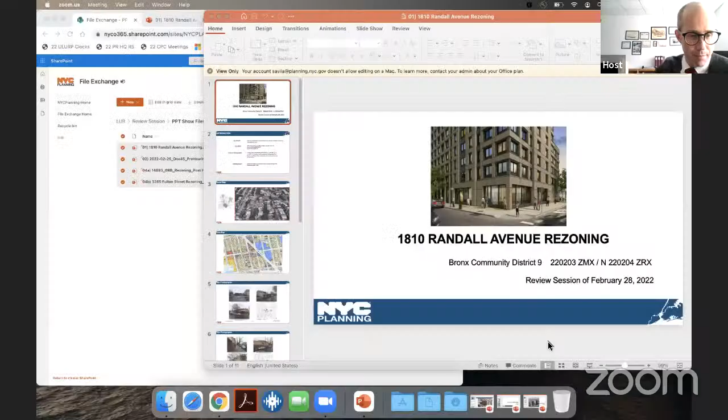Good afternoon, commissioners. This is the 1810 Randall Avenue rezoning here before you for certification. Next slide, please.

The project site is located in the Soundview section of Bronx Community District number 9. The applicant is the Second Pentecostal Church of God La Hermosa and Vertical Community Development, LLC. They are seeking a zoning map amendment from R4A C1-2 and R5 C1-2 to R6 C1-2. In addition, there's a zoning text amendment to Appendix F of the zoning resolution designating the rezoning area as an MIH area. Next slide, please.

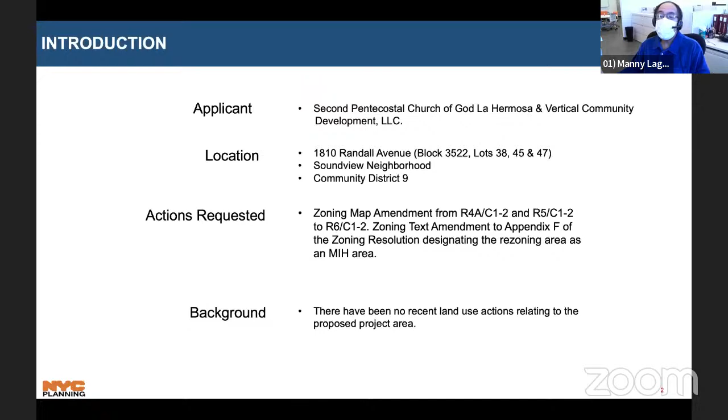The project area development site is outlined in red. It's bounded on the north by Randall Avenue, on the east by Taylor Avenue, on the south by Lacombe Avenue, and Beach Avenue forms the western boundary. The development site is approximately 20,000 square feet of lot area, and it currently contains 3 lots.

2 of those lots contain 2 buildings. One is for an existing house of worship, and the other building contains 4 commercial uses, one of which is vacant. Now, to the right, looking at the east portion of the development site, there's a parking area, accessory parking to the house of worship, and it has a capacity of 20 cars.

The remainder of the block is 2- and 3-story, 1- and 2-family residences. And the same is true for the surrounding areas, basically 2, 3 stories, attached, semi-detached homes in the area. Now, the transportation is good. You have the Bronx 27 bus, which travels east-west along Randall Avenue, and you also have the Bronx 39, which travels north-south at Soundview Avenue. Next slide, please.

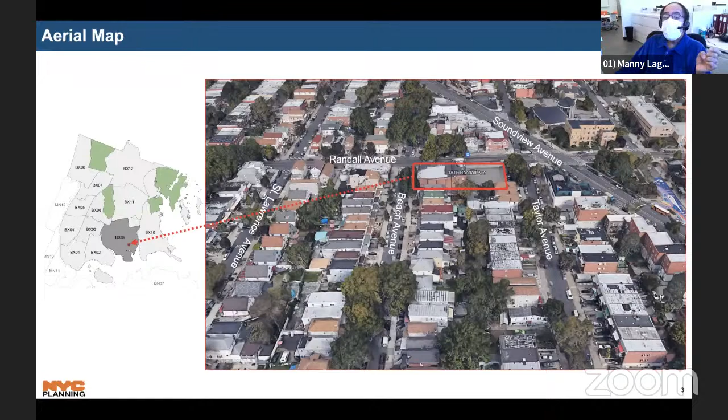In the center, you have the block frontage on Randall Avenue, which is the development site in red. Just moving across Taylor Avenue, you have the Seabury Daycare Center, and 2 blocks away from there, you have PS 69. Above that, you have the Holy Cross Church and School. Again, this land use map indicates the predominance of low-density residential. However, when you go to the west, 2 or 3 blocks away, you can see that there are, in yellow, 6-story developments nearby. Next slide, please.

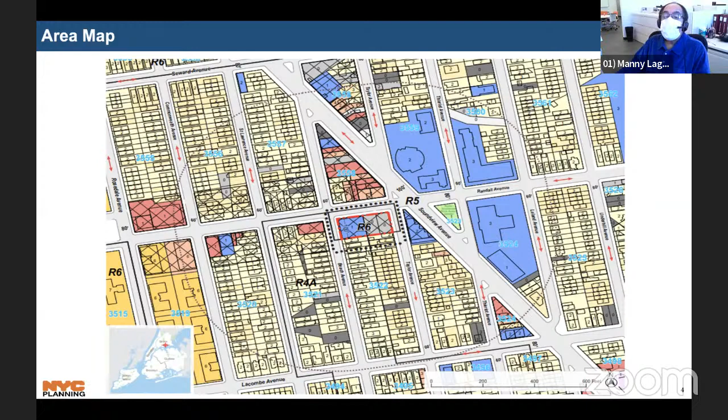These are photographs of the site. We're looking from Randall Avenue south at the parking area that I mentioned, which is accessory to the house of worship. Immediately to the right is the house of worship itself. On the second slide to the right, you see that adjacent to the house of worship you have the 4 commercial uses. And the bottom left slide is at the intersection of Randall Avenue and Beach Avenue. It shows you the other side of the building. Next slide, please.

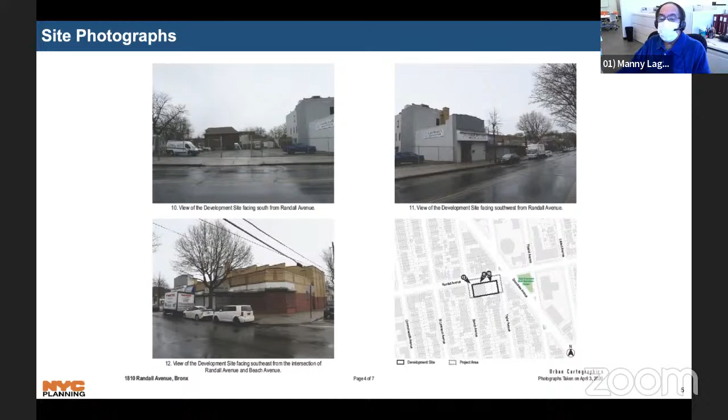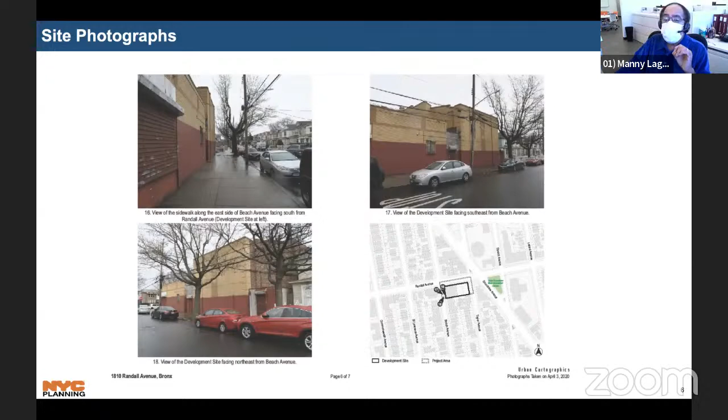Here we're looking at Beach Avenue. We're looking south again. We're at Randall Avenue, and you can see in the background the character. It's again basically low density housing. The same is true on the right. It shows the building almost abutting on the residences themselves. Next slide, please.

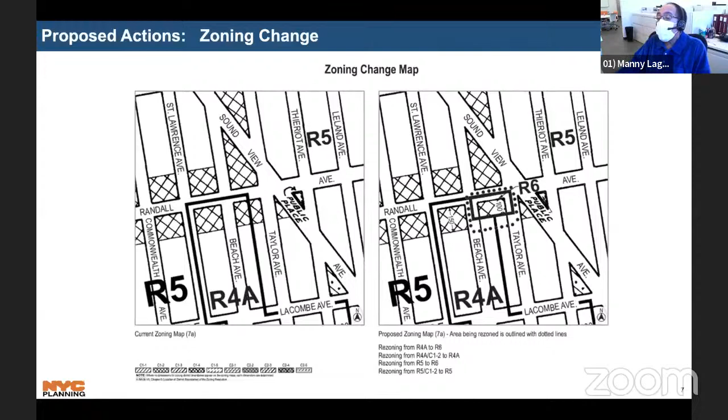This is your existing and zoning maps. Again, in the center, you see that the site is split. It's on the western portion of that block is R4A, and on the eastern portion is R5. The drawing on the right indicates what the zoning proposal will do at this location, the establishment of an R6 zoning district, which will allow the applicant to build an 8-story mixed-use building. Next slide, please.

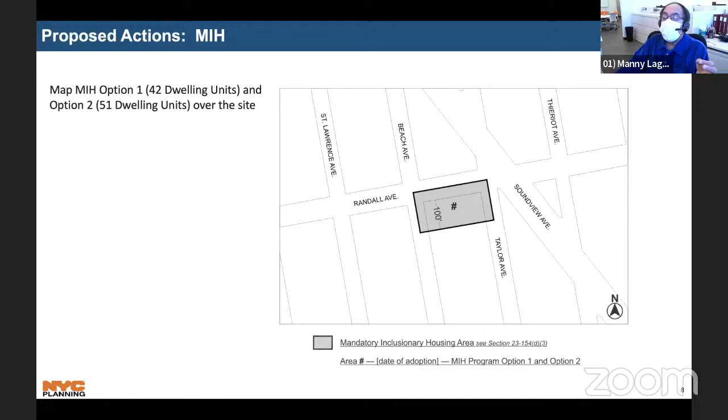And the other action is the text amendment to Appendix F of the zoning resolution, as you can see here, it is mapped. The applicant has selected option 1 and option 2. Option 1 affords 42 dwelling units, and option 2, 51 dwelling units over the site. I just want to mention that the overall development is 100% affordable. Next slide, please.

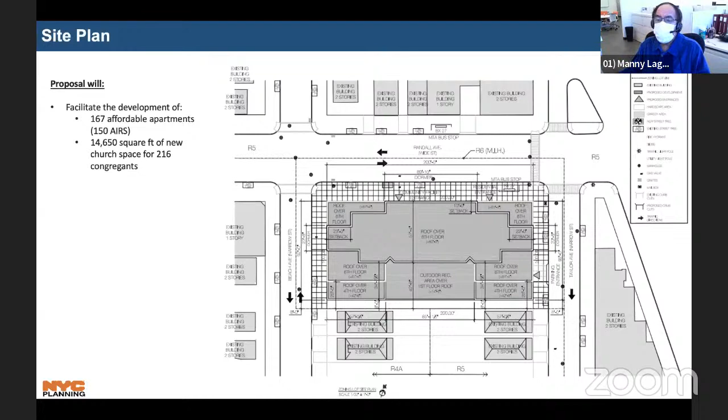The site plan indicates that your 8-story building is stepping down. It steps down towards the frontage of Randall Avenue, as well as it gets closer to the residential homes on the south, stepping down from 8 to 6 stories to 4 stories. In addition to that, the applicant has provided an 8-foot side yard for further separation of these uses, allowing for light and air to these adjacent abutting uses. Next slide, please.

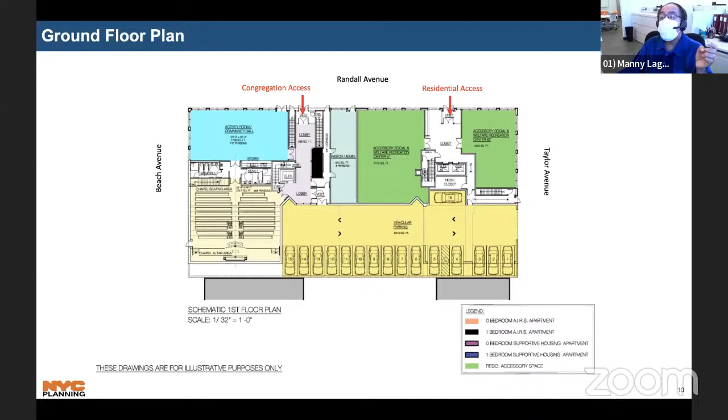Okay, the floor plan in blue shows the activity room and community hall for the house of worship, which will stay at this location. Just below that is the chapel, with a seating capacity of 216 seats. The access to the congregation, as shown in red, is off Randall Avenue, along with the residential access. In green, you see there are 2 recreation centers. In the back, there will be accessory parking for 16 cars, accessed through Taylor Avenue, which is a 2-way street.

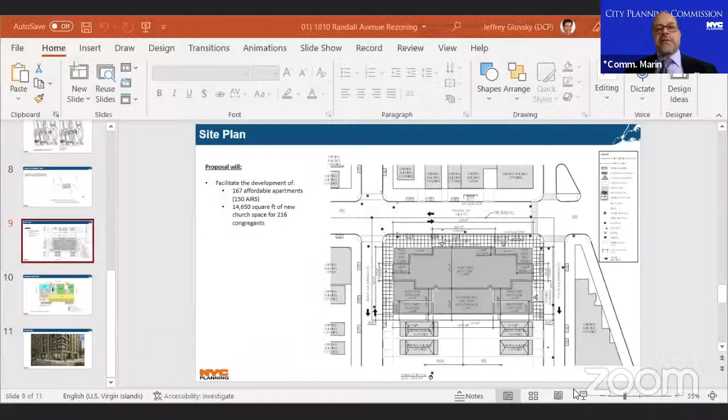Yes, I will convey this information to the applicant.

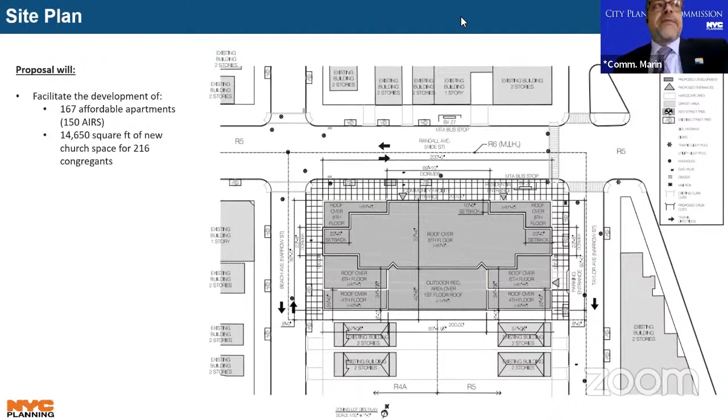I think what's more important for us is the marketability and lease-up of those studios and one-bedrooms. I think that would be very helpful. Thank you, Commissioner.

Looking to see if anybody else has questions or comments. Seeing none, this matter is certified. We thank you very much for the presentation, Manny. We'll see you soon, and we're moving on to our next item of the day, the Manhattan pre-hearing item.

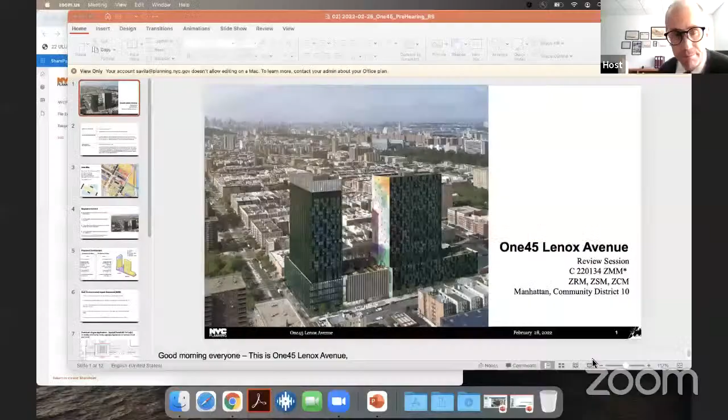So Ryan, would you like to introduce that? Sure - it's the second item on the agenda, pre-hearing review of a zoning map and zoning text amendments and special permits in Manhattan Community District 10. Our presenter is Jose Trucios. Hi everyone. Good afternoon, everyone. This is One45 Lenox Avenue.

A private application on behalf of One45 Lenox LLC for a zoning map amendment, two zoning text amendments, 3 special permits, and 3 City Planning Commission certifications to facilitate development of a mixed-use building in Community District 10, Manhattan. The application was certified on November 15, 2021, and was duly referred to Manhattan Community Board 10 and the Borough President for 60 and 30 days, respectively. The proposal will yield a new mixed-use building with up to 939 new apartments in Central Harlem, as many as 292 of them reserved for low and middle-income households under the Mandatory Inclusionary Housing program. It will also include commercial office space, including ground floor retail and a Museum of Civil Rights, a new headquarters for the National Action Network, and up to 141 off-street accessory parking spaces in a below-grade facility.

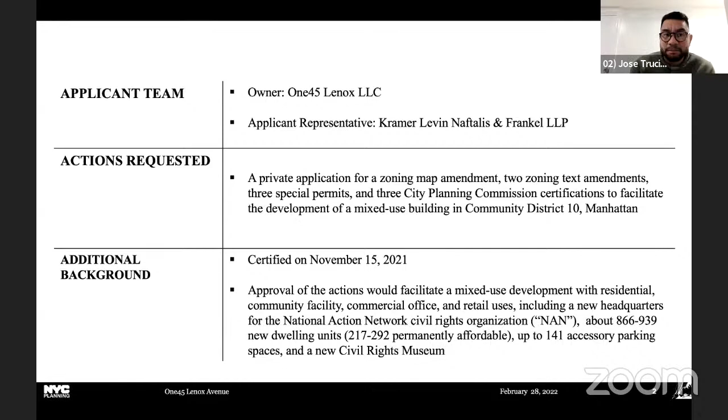The project area, which is coterminous with the development site, is located at the intersection of 145th Street and Lenox Avenue in the northern portion of Central Harlem. The site is immediately adjacent to the 3 subway stop at 145th Street and across Lenox Avenue from the Colonel Young Playground, just west of the 145th Street Bridge and the Bronx. The development site is zoned C8-3, R7-2 with a C1 commercial overlay. C8 districts do not permit residential uses and will also not permit a museum.

The portion of the development site zoned R7-2 with the C1 commercial overlay is on Lenox Avenue and West 144th Street. This portion of the development site is approximately 10,000 square feet and is the only portion of the development site that will allow residential use.

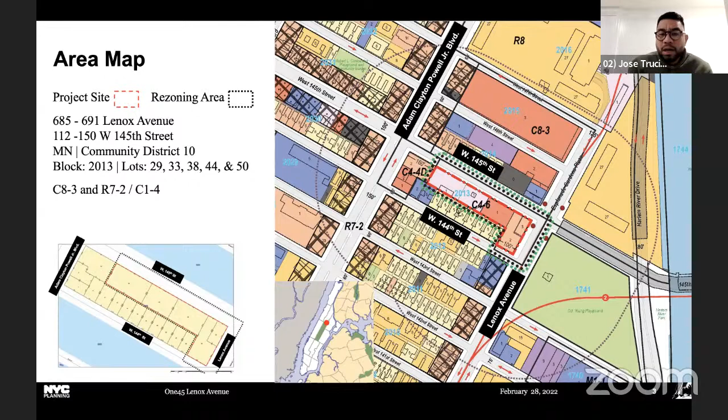The surrounding area is predominantly zoned R7-2 with multifamily residential buildings averaging 5 to 6 stories in height. There are also large residential complexes close to the development site, including Esplanade Gardens, located at the northeast corner of West 145th Street and Lenox Avenue; the New York City Housing Authority Drew Hamilton Houses, 1,000 feet to the west; and the Savoy Park Apartments, 1,000 feet south of the development site. Each of these developments varies in height from 15 to 30 stories.

The development site currently consists of vacant land, a shuttered gas station, an active gas station that also provides parking for area residents, and some active commercial, retail, and community facility uses.

To facilitate the development, the applicant is requesting the following land use actions: a zoning map amendment to rezone the project area from the existing C8-3, R7-2 with the C1 commercial overlay zoning districts to a C4-6 zoning district; a zoning text amendment to map the area as MIH on the site; and a special permit to allow the location of the banquet hall above residential units at the top of Tower 1. There are also 3 special permits within the newly created large-scale general development to modify height and setback regulations, use location regulations, community facility signage regulation, and to waive required accessory parking. Additionally, there are 3 CPC certifications to waive the retail frontage regulation and to permit a total of 3 curb cuts.

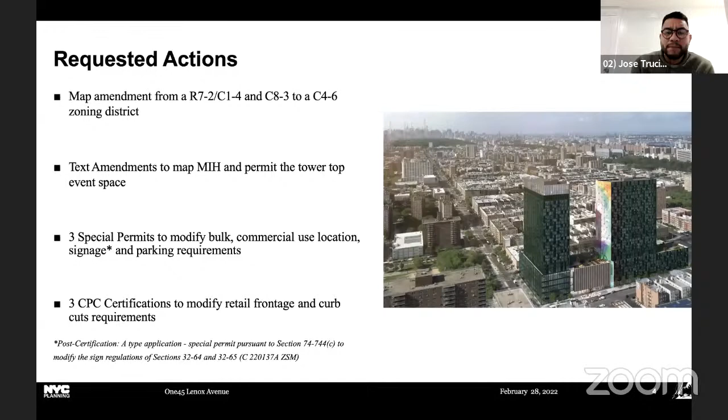Due to unknown market conditions, the proposed development will be constructed under either of two potential development scenarios: a commercial podium and a residential podium scenario. The overall massing and building height do not change between the two scenarios; what varies is the balance of commercial versus residential floor area on the lower floors of Building 1, highlighted in the hashed area of this drawing.

The proposed building height is 363 feet, approximately 30 stories. This height does not include the mechanical bulkhead. A residential podium will create 939 residential units, while the commercial podium will create 866 residential units.

The development will include between 217 and 282 permanently affordable units under MIH, depending on which scenario option is developed. In either scenario, the development will include a new headquarters for the National Action Network, a banquet hall, and a museum of civil rights.

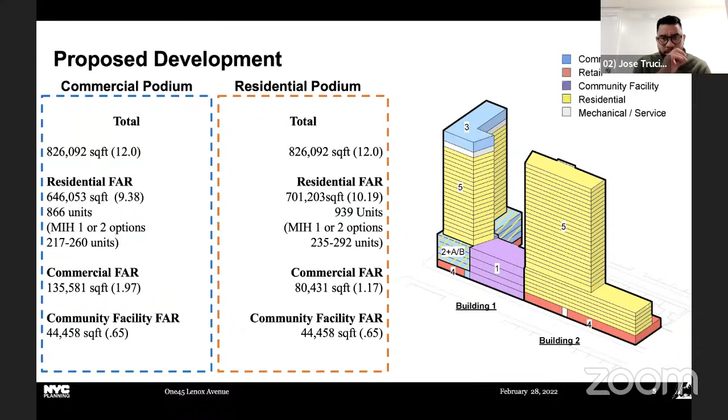With respect to the draft environmental impact statement, a scoping meeting was held on May 10, 2021, and a notice of completion was issued on November 12 of the same year. The DEIS identified significant adverse impacts to open space and construction period noise, and the applicant is currently exploring mitigation measures identified in the DEIS, which will be explored further in the final environmental impact statement.

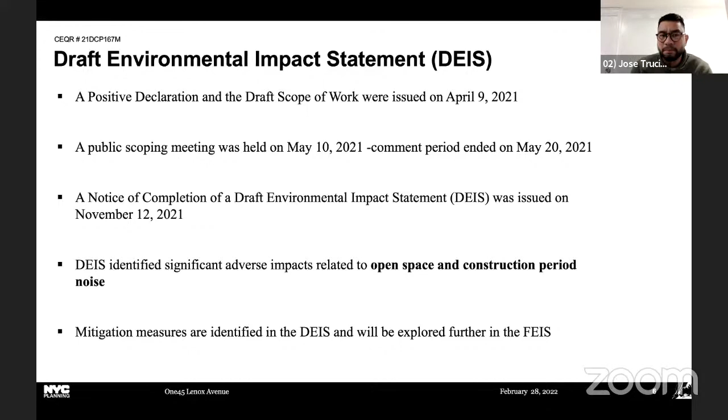After certification, the applicant filed a modification to the existing special permit application pursuant to section 74-744(c) to modify the sign regulations and to permit community facility signage on the mid-block of West 145th Street. The special permit is required because in the C4-6 district, the zoning resolution limits the total surface area of accessory signs, non-illuminated signs, and illuminated signs, as well as limiting the projection of permitted signs and the height of signs.

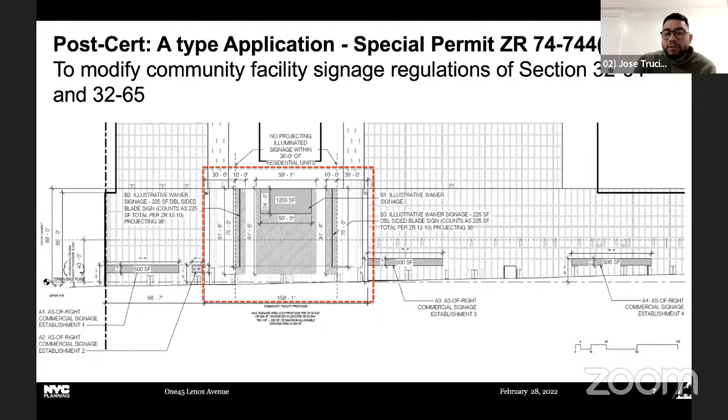The drawing illustrates the proposed community facility signage program, for a total surface area of 1,650 square feet, consisting of two multifaceted illuminated blade signs, each with a total signage surface of around 225 square feet, a portion of which is located above a height of 40 feet and below a height of 89 feet, and projecting 36 inches across the street line of West 145th Street. Lastly, a 1,200 square foot illuminated sign located above a height of 40 feet and below a height of 89 feet as well.

The museum entrance is located on West 145th Street, approximately 90 feet from the corner of West 145th Street and Lenox Avenue. Approval of the signage waivers will, according to the applicant, provide signage that is adequate for identifying the museum and establishing its presence on West 145th Street and the Central Harlem community.

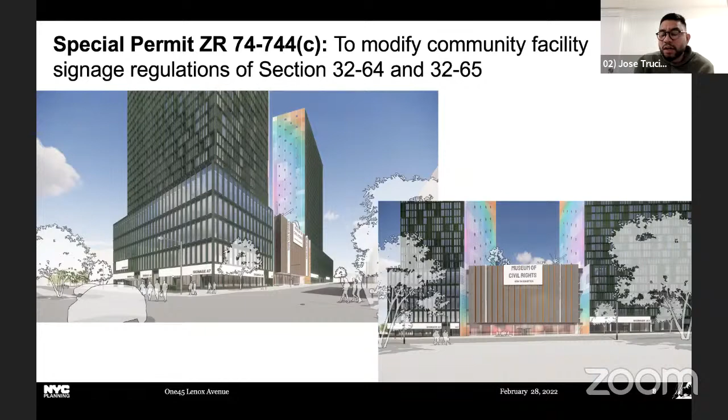On January 5th, Manhattan Community Board 10 voted to disapprove the application, by a vote of 35 in favor of disapproval, 0 opposed, and 2 abstentions. The Community Board did not include any conditions in the resolution, but cited numerous concerns with the proposal related to the number of affordable units, the levels of affordability and unit mix, open space, congestion and transportation, and accessibility to infrastructure, which were also topics of discussion during the two public hearings.

While CB10 did not meet to discuss the post-certification application for the signage waivers, they are aware of the proposed changes and opted to carry the same resolution as the one adopted on January 5th, which is disapproval of the application.

On February 23rd, the Manhattan Borough President recommended disapproval of the application unless the applicant commits to meeting certain conditions. This is a summary of what was submitted by the Borough President, including increasing the number of affordable units to 50% of total units, yielding up to 469 affordable units, and increasing the portion of affordable family-sized units.

The units should also be provided at AMI levels more appropriate to the Harlem community. The Borough President also asked the applicant to work with the MTA, Department of Transportation, Department of Parks, and the local community to track the development's impact and identify potential mitigation and improvements, and to update the restrictive declaration with specific language committing to have the open space above the museum accessible to the public.

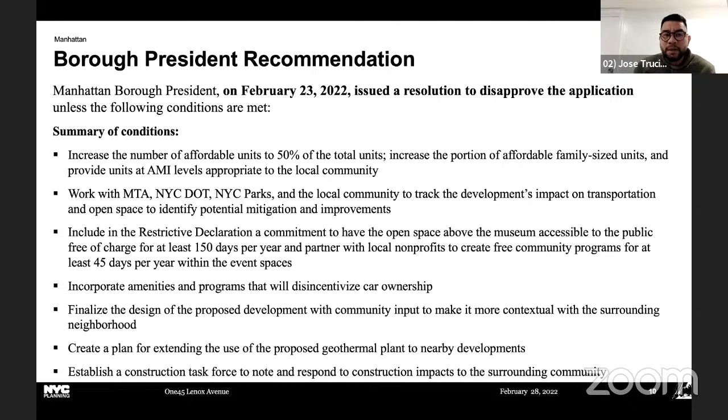To summarize, approval of the actions will allow the applicant to develop a 363 foot mixed-use building with up to 939 new apartments, with as many as 282 reserved for low and middle income households. It will also include commercial office space, ground floor retail, a new headquarters for the National Action Network, up to 141 off-street accessory parking spaces, and the Museum of Civil Rights.

According to the applicant, the Museum of Civil Rights will be a first-of-its-kind institution committing to preserving and promoting knowledge of the historic and contemporary intersectional struggles for civil rights, political rights, and social justice in the northern United States. The museum's gallery space will feature immersive multidisciplinary exhibits of the history of the Northern Civil Rights Movement and contemporary social justice movements that continue to transform the social landscape in the United States.

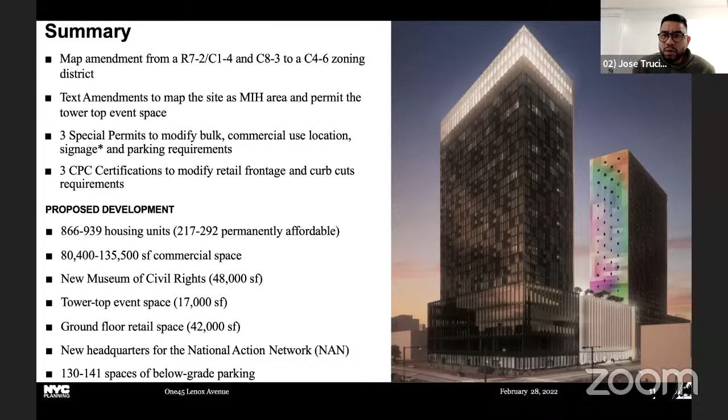With that, I can answer questions, and thank you very much for your time. Thank you very much. Let me start with Vice Chairman.

Thank you, sir. Jose, I seem to recall at certification there was at least one rendering of what an as-of-right construct would look like. I think for the public hearing it would be good to have that, so we can contrast what would be permitted as opposed to what's proposed.

We'll note that. Thank you, Mr. Vice Chairman. Before I go to the other commissioners, let me ask about the museum, particularly the space being contemplated for it.

Which is about 48,000 square foot space. As I understand it, this museum is in development - it is not an existing group seeking a new location, this is a brand new endeavor. Tell us where that stands, and also, perhaps equally significantly, what could that space be used for if reserved as proposed for a museum? If a museum does not occupy that space, what would happen next?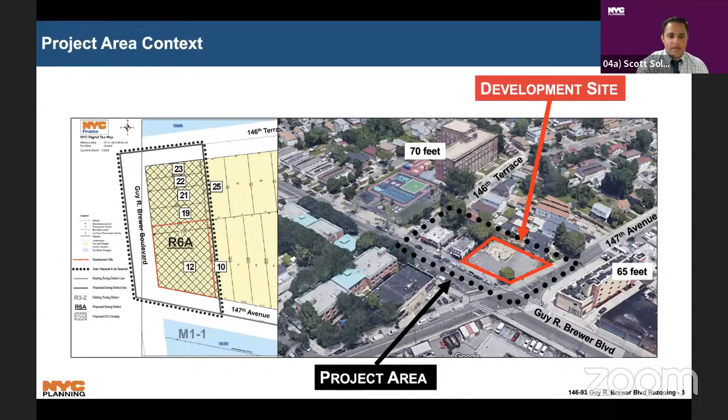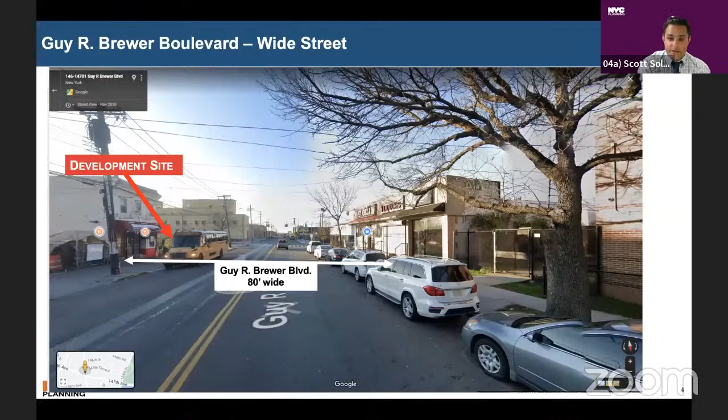Next slide. Regarding the width of the intersecting streets, Guy Brewer Boulevard is a wide street at 80 feet and intersects with 147th Avenue. Moving to the next slide, 147th is also an 80-foot wide street, immediately in front of the project area. Next slide.

And then moving back to this area map, the department believes that the proposed R6A zoning district and the density and building envelope that it would facilitate is appropriate at this location on a major north-south corridor with ample bus stops in the immediate vicinity and buildings of a similar context to the north and south of the project area. The maximum street wall height of 65 feet and a setback of 10 feet will make the height of the

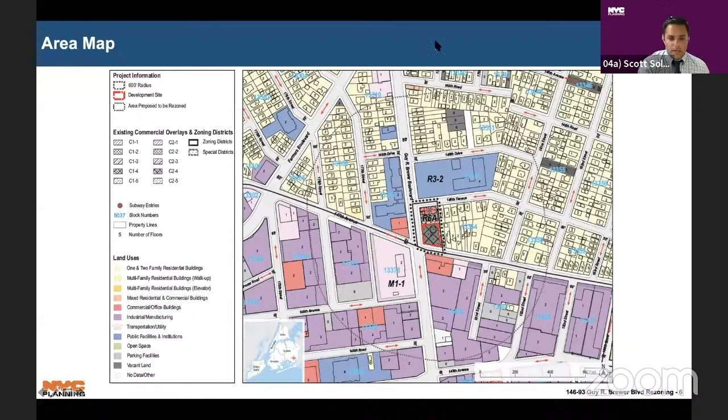building nearly imperceptible from the street. And mapping mandatory inclusionary housing will ensure that 11 of the proposed 42 dwelling units are permanently affordable to families making up to 60% of the area median income. So that sort of concludes the focus of these slides to address the R6A in the conversation that the community board, the applicant was addressing from the borough president. But again, the applicant believed that the R6A to be appropriate density. The department concurs at this intersection of 2 wide streets.

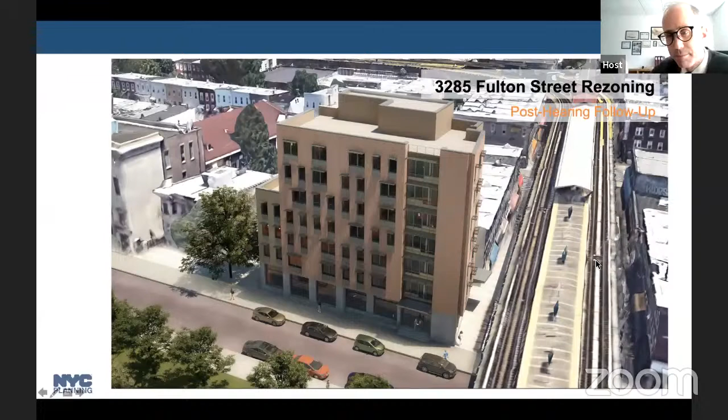Okay. Yeah, we have 3285 Fulton Street rezoning. Alexandra Patti Diaz here with another presentation, a little follow-up. Alexandra, you're here? Hi. Hi, okay. Good afternoon, commissioners. This is a post-hearing follow-up presentation.

Next, just a quick reminder, the 3285 Fulton Street rezoning is proposed by Cypress Hills Local Development Corporation, and they're seeking a zoning map amendment and zoning text amendment to facilitate a new senior housing and a daycare center in East New York.

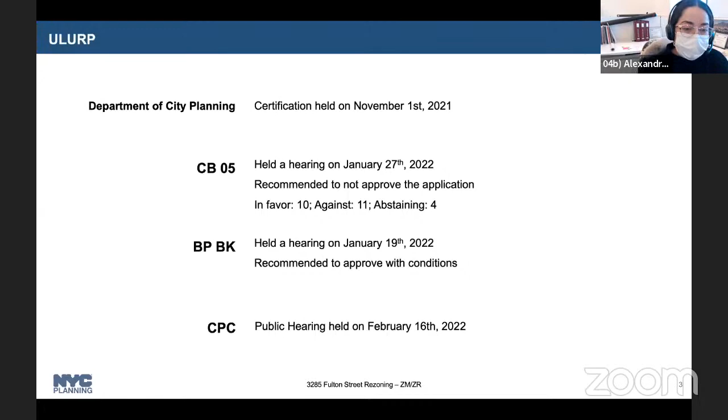Next. During the public review process, the BP recommendation was to approve with conditions. Next. Part of the conditions was to modify the rezoning area, to reduce the rezoning area to only half of the block and map an R7A district only on the project site, and for the 3 other lots to be mapped R6B district. And it's the desire of the Brooklyn office to respond to this recommendation.

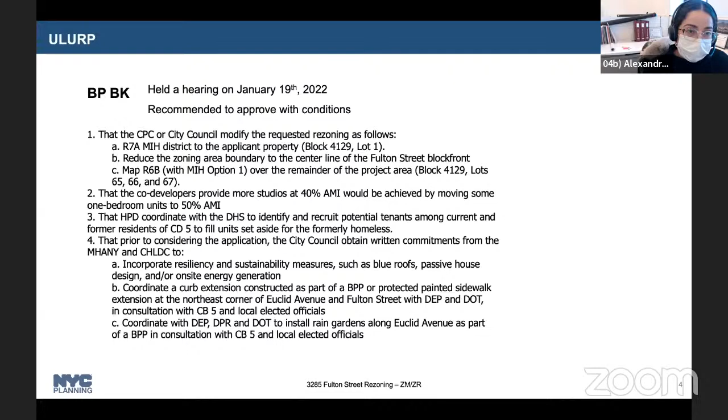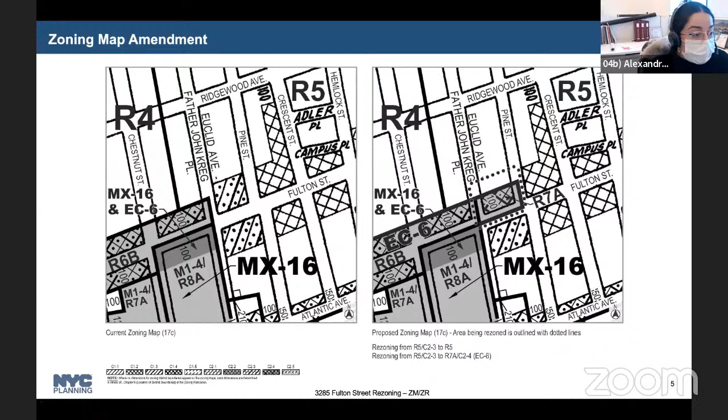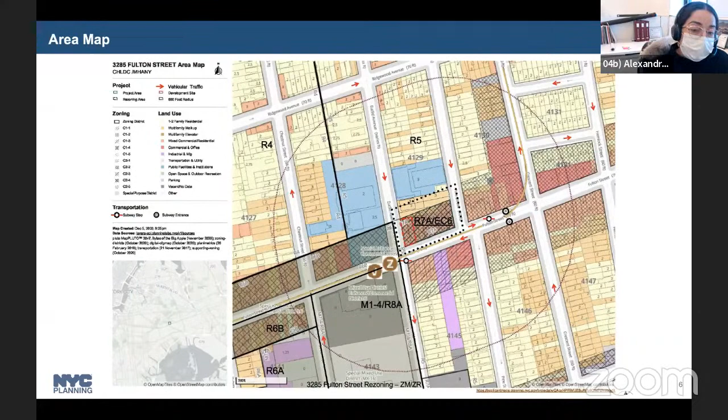Next. So we believe that the R7A density is appropriate on this location as proposed on the whole block front, given its proximity to transit, but also to other high density districts mapped across the site during this East New York rezoning, and where also important new community services and new affordable housing developments are currently under construction. Next. The modification as requested will result in 3 zoning districts mapped on a single block front, and as proposed by the borough president, we believe that is not an appropriate land use rationale.

Next. It is our approach during the East New York neighborhood plan and the subsequent rezoning to strengthen the commercial corridor on Fulton Street, and the result of it was to map greater density alongside the subway stations and lower densities in between. And we believe the pushing of density away from the subway station as proposed is also not appropriate. Next.

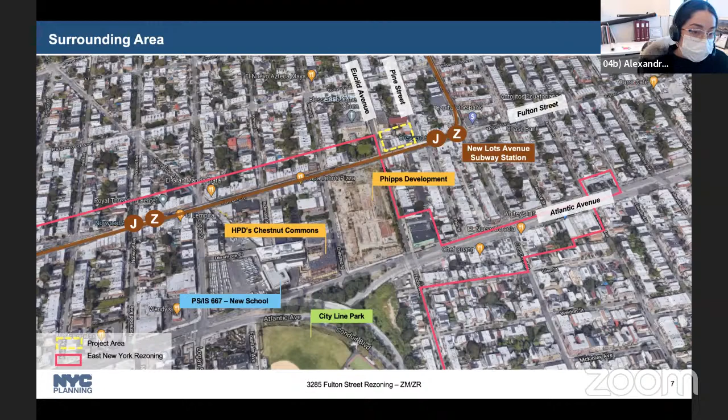We're also less concerned about redevelopment of these individual lots because that's not necessarily what we have seen on Fulton Street. First, all these lots are currently under different ownership, and the sites developed on this corridor have been either vacant lots or vacant buildings, and usually subsidized. These lots, it is our understanding, are active residential buildings with active uses on the ground floor. And lastly, in the rarity that these lots get redeveloped in the future. The proposed rezoning ensures that some MIH units will be provided.